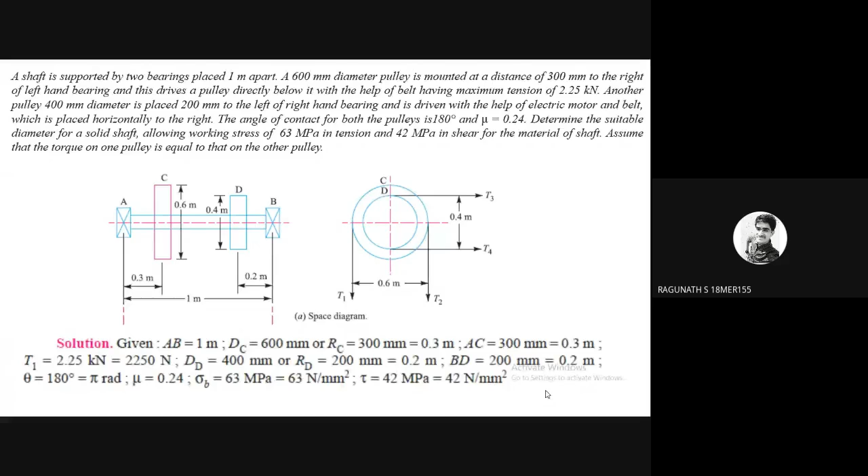So the problem is: a shaft is supported by two bearings placed 1 meter apart. So the shaft length is 1 meter, supported with the help of the bearings.

The A and B are bearings. A 600 mm diameter pulley is mounted at a distance of 300 mm to the right of the left hand bearing, which is bearing A. So from A to the right side is 300 mm, that is 0.3 meter, and the pulley diameter is 600 mm. So pulley C's diameter is 0.6 meter.

This left hand bearing drives a pulley directly below it with the help of a belt having maximum tension. So this pulley is driven by a belt drive, and its maximum tension is 2.25 kilonewton.

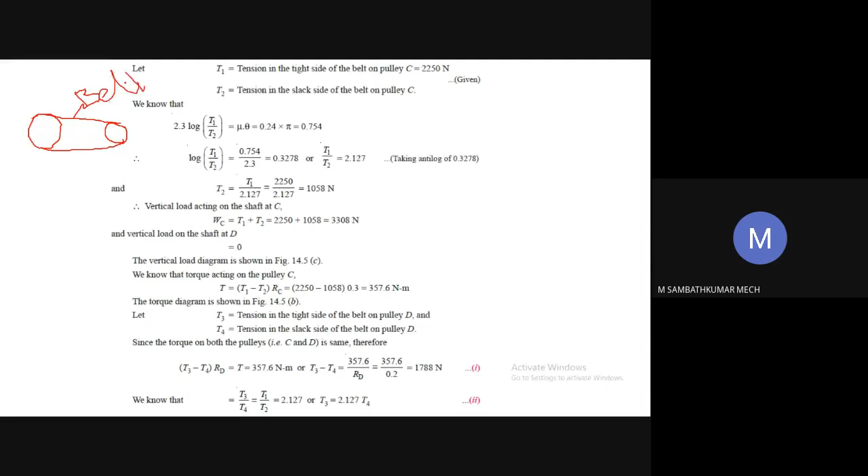If you consider pulley C, it is driven by some other pulley with the help of a belt drive. So this is the belt, this is one pulley and this is another pulley - consider this as your pulley C. When it is rotating in a clockwise direction, one side is the tight side and the other side is the slack side.

At the pulley side, during the meshing or contacting of the pulley and belt - when it starts to engage, that side is the tight side; when it disengages or releases contact, that side is the slack side. So the tight side tension is named T1 and the slack side tension is T2.

Okay, so in your problem, assume this is T1 and this is T2. T1 is the tension in the tight side and T2 is the tension in the slack side.

So the force for T1, the value is given: 2.25 kilonewton. So T1 is equal to 2.25 kilonewton, that is 2250 Newton.

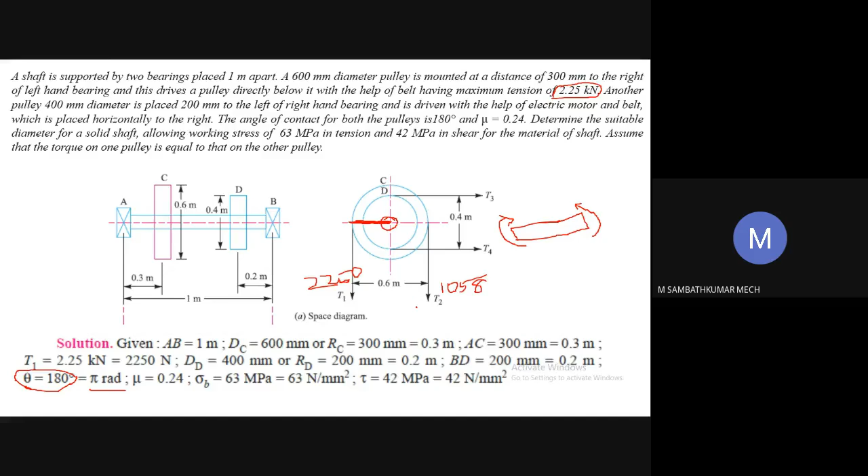Okay, here the shaft is attached. So in that shaft the torque will be generated based on the C pulley forces. In the C pulley, the tension side is 2250 and the slack side is 1058. When the torque is generated, it means the difference between the two loads multiplied by the perpendicular distance. So the torque is equal to T1 minus T2 into radius of the pulley C. So 2250 minus 1058 into radius of the pulley. The radius of the pulley C, diameter is 0.6 meter, so therefore radius is 0.3 meter.

So into 0.3, we can get the torque: 357.6 Newton meter.

And in your problem, assume that the torque on the pulley is equal to that on the other pulley. So if the torque generated in pulley C is equal to the torque generated in pulley D, you can write it as TC is equal to TD, or otherwise for TD is equal to, similarly you can write a similar formula for pulley D.

So for pulley D, that is T3 minus T4. Here the tension side is T4 or T3 and the slack side is the opposite one. So T3 minus T4 into perpendicular distance, radius of the pulley D, is equal to your torque, that is TD, torque on the pulley D.

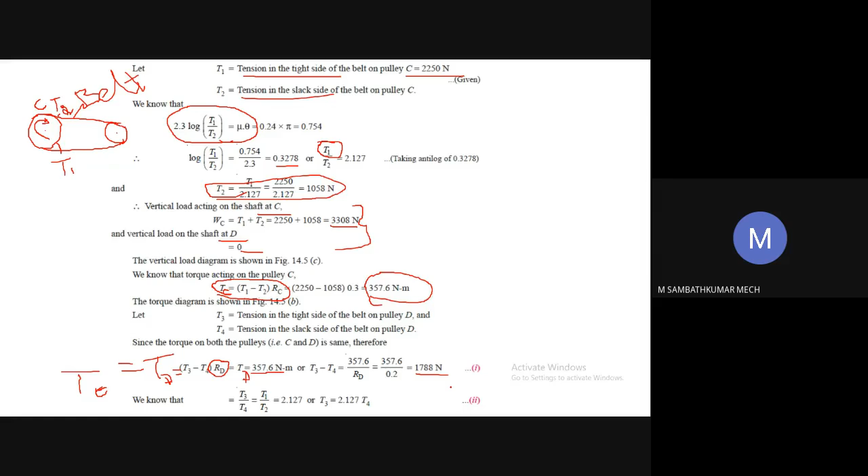The diameter of pulley D is given, so from that we know the RD, radius of the pulley D. So therefore T3 minus T4 is equal to 1788 Newton.

So just consider in the shaft or in the pulley C, some torque is generated. The same torque is generated in pulley D also. It is the condition that the torque on pulley C and the torque on pulley D are equal. So T1 by T2 is equal to T3 by T4. You can write it as T1 by T2 is equal to T3 by T4.

Okay, then only we can get the equal torque. So further, T1 by T2 is equal to T3 by T4. So from that we know the T1 T2 value, or we know the ratio. T1 by T2 is equal to 2.127. Substitute here, so from that I can write T3 is equal to 2.127 T4.

So T3 is equal to, in terms of T4, substitute this value into the term T3 minus T4 is equal to 1788. So we can get T3 is equal to 3376 Newton and T4 is equal to 1588 Newton.

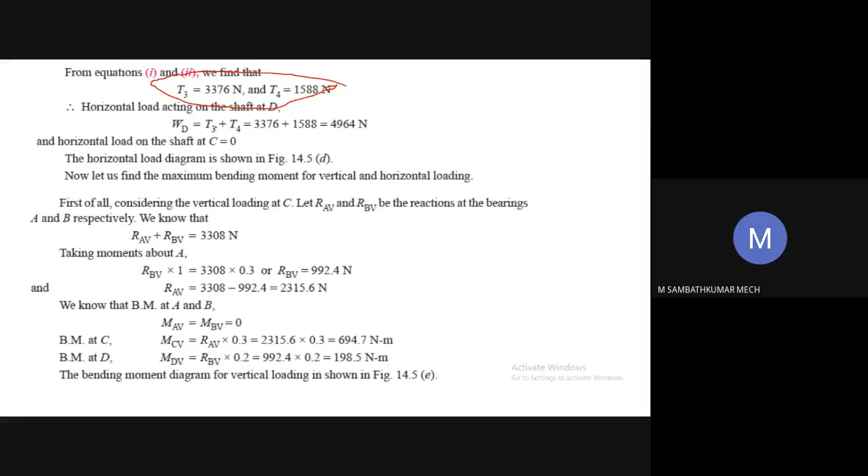In pulley D, the tension side load is 3376 and the slack side load is 1588 Newton. So therefore, similar to pulley C, the total load acting on pulley D. In pulley D, it is a horizontal load. So the total horizontal load acting on pulley D or shaft D at point D: WD is equal to T3 plus T4, that is equal to 3376 plus 1588. You can get 4964 Newton.

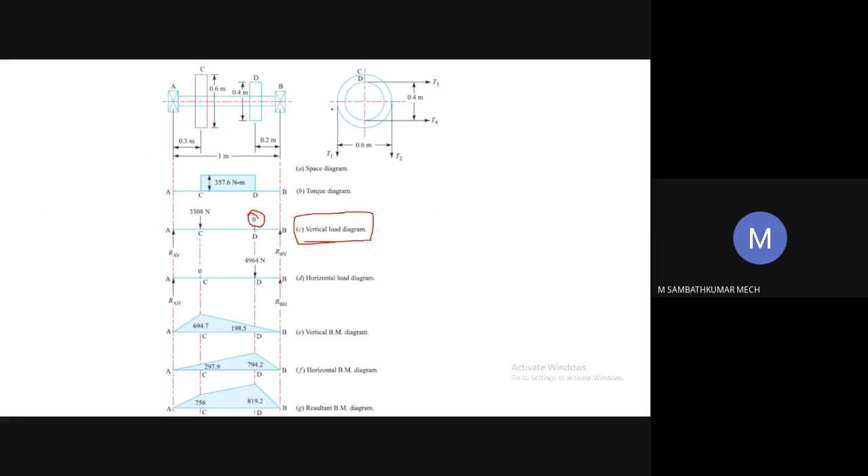And there is no horizontal force or load acting on pulley C. So at pulley C or at point C in the shaft, the WC value is 0. This should also be mentioned in your diagram. In this diagram, the horizontal load diagram at point D gives the value 4964, and at point C, there is no horizontal load, so that is 0.

And you already calculated the torque value, that is 357.6 Newton meter. At C and at D the values are equal, so it is uniform or rectangular. The torque value already calculated is 357.6, and vertical load, horizontal load calculated. So draw an individual diagram for that.

After calculating the vertical and horizontal load, you should calculate the reaction force for calculating the bending moment. You should know RAV, RBV, similarly RAH and RBH. If you calculate RAV and RBV, you can get the vertical bending moment diagram. Similarly, if you calculate RAH and RBH, you can get the horizontal bending moment diagram. From the vertical and horizontal bending moment diagrams, you can get the resultant bending moment diagram. So first we are going to discuss RAV and RBV.

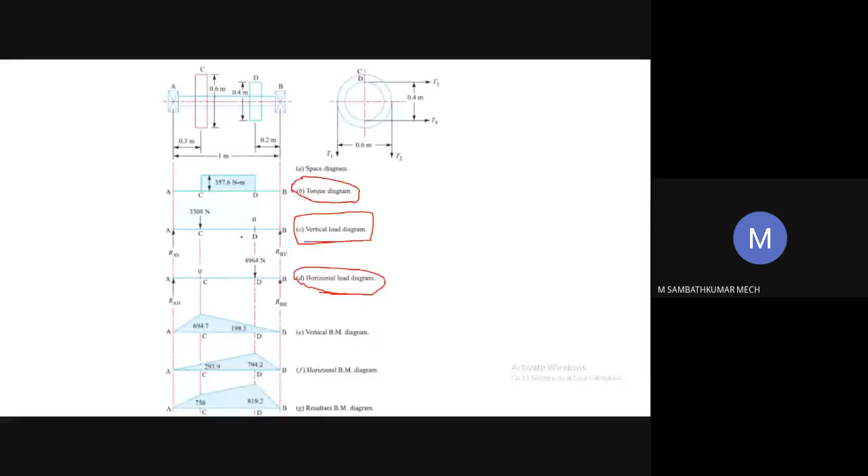So first one, RAV and RBV. In your vertical load diagram, the total load acting on the shaft is 3308. The total load at C point is 3308, at D point 0. So therefore RAV plus RBV is equal to 3308.

Taking moment about point A, RBV into the perpendicular distance. The perpendicular distance is 1 meter. So RBV into 1, considering this A point, taking moment about A point. RBV into 1 is counterclockwise, and at C point, considering this force, it is clockwise.

So RBV into 1 is equal to 3308 into the perpendicular distance, which is 0.3. So RBV into 1 is equal to 3308 into 0.3. From that, RBV is equal to 992.4 Newton. And we already know RAV plus RBV is equal to 3308, so from that we can calculate RAV.

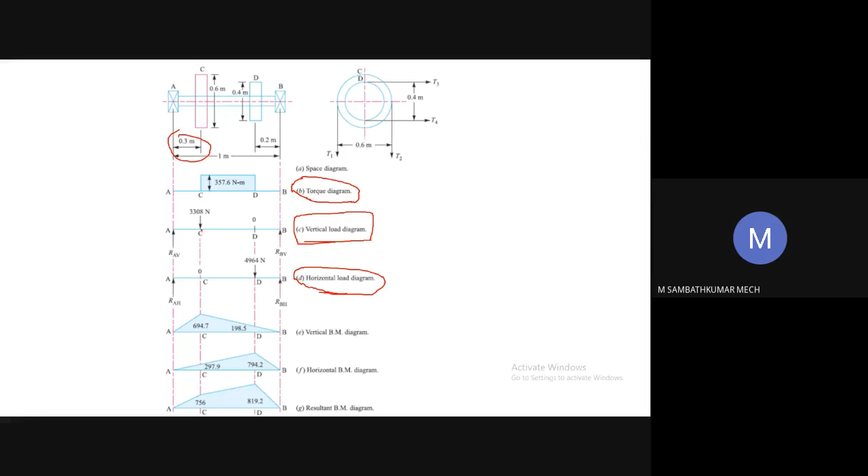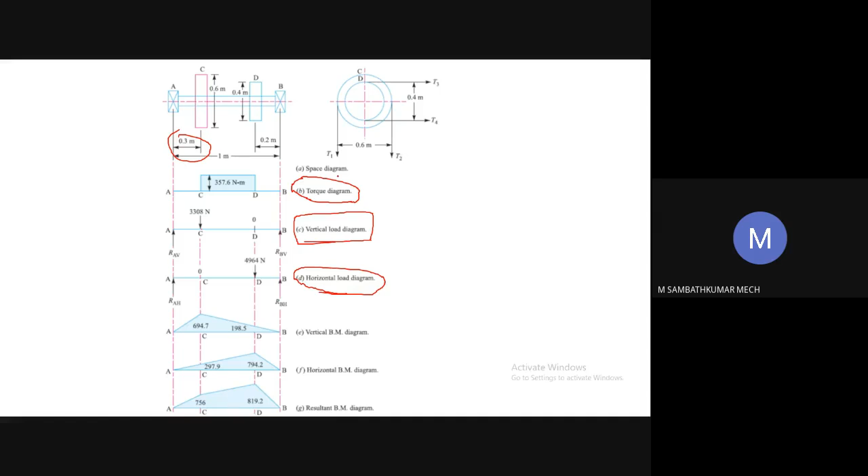Bending moment at C, RAV into the perpendicular distance 0.3, or otherwise RBV into 0.7. You can take any one: RAV into 0.3, or RBV into 0.7.

So we can get bending moment at C: RAV into 0.3 is equal to 694.7 Newton meter, or otherwise RBV into 0.7. The total length is 1, so 1 minus 0.3 is 0.7, and RBV into 0.7 gives the same answer.

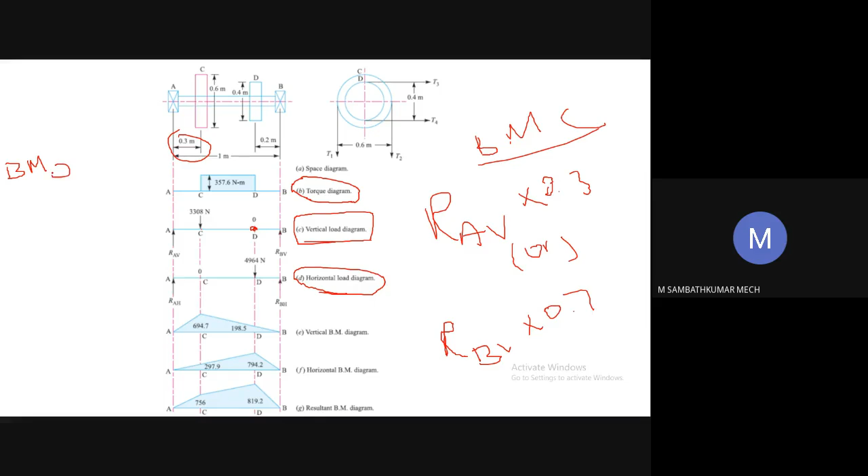Similarly, bending moment at D. Consider this point. For bending moment at D, RBV into the distance 0.2, or here two forces are there: one is RAV and another is 3308. So you can write RAV into the total distance 0.8. From D point to A point is 0.8. So RAV into 0.8, and this is upward force, and 3308 is a downward force.

So minus 3308 into, from C to D, the distance is 0.5 meter. You can use any one: RBV into 0.2, or RAV into 0.8 minus 3308 into 0.5. From this we can get the vertical bending moment at D. The value is 198.5.

So bending moment at C, due to the vertical component, is 694.7, and at D it is 198.5. This was mentioned in our diagram.

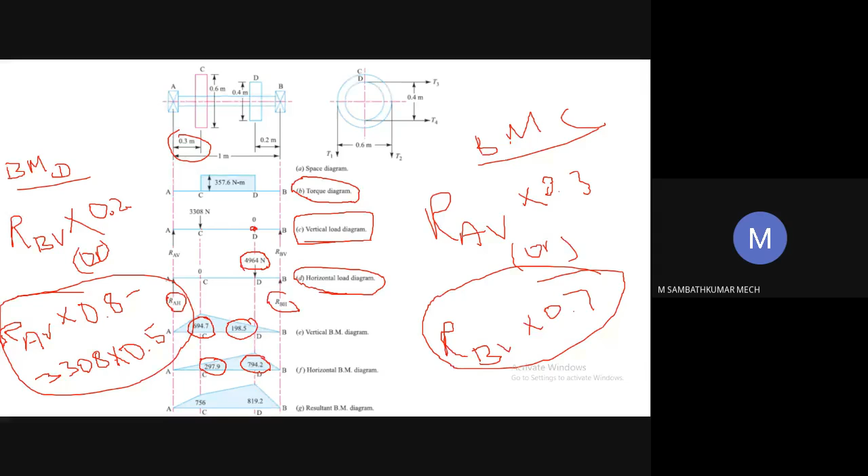This is your vertical bending moment and this is your horizontal bending moment. At the C point, you know the vertical and the horizontal. Similarly, at the D point, you know the vertical and the horizontal. So from that we can calculate the resultant bending moment. The formula is square root of horizontal squared plus vertical squared, or vertical squared plus horizontal squared, whatever it may be.

So from these values we can get the resultant bending moment diagram. At C, square root of 694.7 squared plus 297.9 squared gives 756. Similarly, the resultant bending moment at D is equal to square root of 198.5 squared plus 794.2 squared, and we can get 819.2.

So from this we can get the resultant bending moment at C, 756, and the resultant bending moment at D, 819.

So the maximum bending moment is 819.2. You should consider this value only, because design is based on the higher value only. Don't consider the lesser or smaller value. So therefore the maximum bending moment is 819.2 at the D point.

That is 42 megapascal, or 42 into 10^6 Newton per meter square. Sorry, 10^6 Newton per meter square. So while converting meter into millimeter, you can get 42 Newton per millimeter square.

So substitute in your equation, and in this equation the unknown is diameter only. So from that we can calculate the diameter of the shaft.

So in this problem, the sigma B value is also given, tau value, shear value, and tension bending stress value also given. So you should also consider the equivalent bending moment formula.

So therefore ME is equal to, already we know the formula, half into m plus square root of m squared plus t squared. This square root of m squared plus t squared is equal to TE, so that was replaced here. So we can write the equivalent bending moment formula as ME is equal to half m plus TE.

So we know the maximum bending moment is 819.2, substitute that, and TE value is already calculated, that is 894 in terms of meter. So the total equivalent bending moment is 856.6 into 10^3 Newton millimeter.

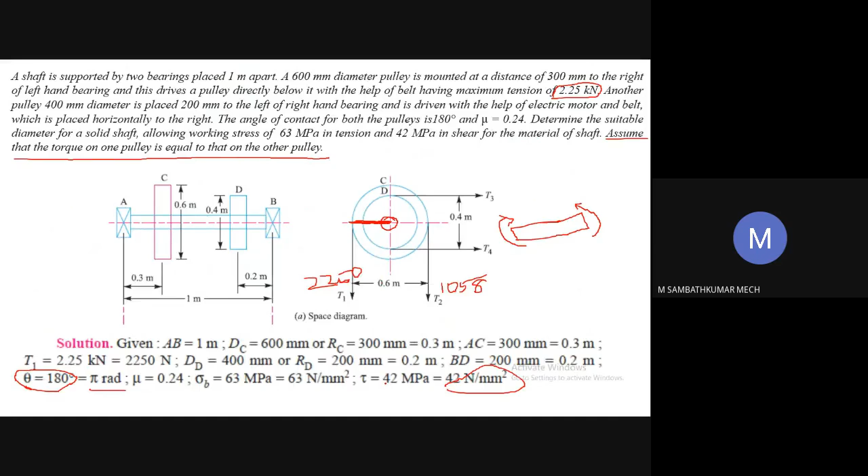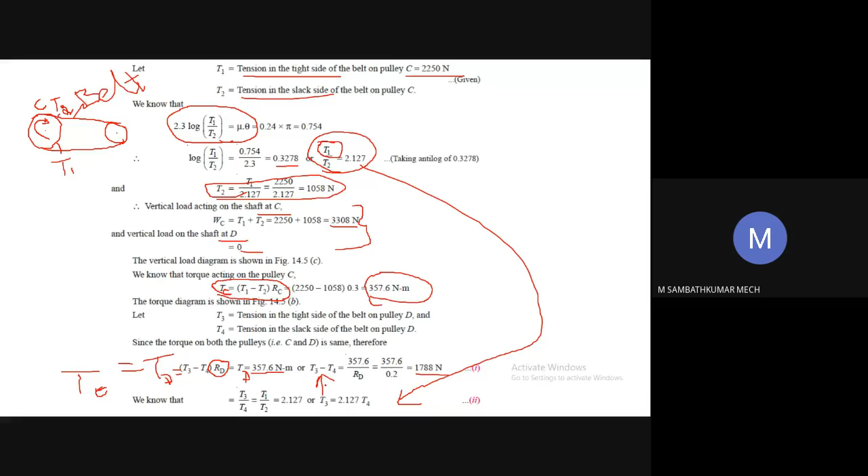So first you should calculate the torque. For calculation of torque, you should know the total load at point C and point D. It is T1, T2. Similarly, for pulley D, T3, T4. You should calculate T1, T2, T3, T4. So from that, you can calculate the torque value at C and the torque value at D.

After that, by calculating the reaction force due to the vertical component and the horizontal component, you should calculate the reaction force. So from that reaction force, you can calculate the bending moment, horizontal component bending moment and vertical component bending moment.

Finally, calculate the resultant bending moment. So from the resultant bending moment, you should consider the maximum value. Design should be based on the maximum values only. Don't design for a lesser value or lower values for any component.

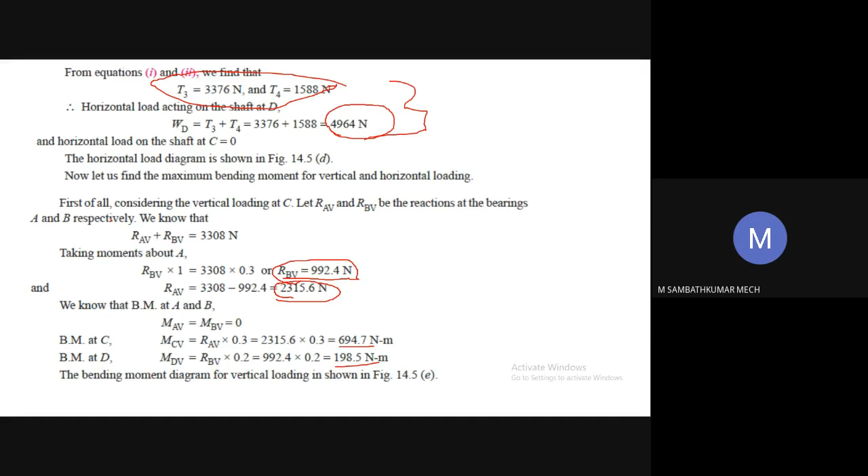So in this problem, two bending moments we can get: one is 756 and 819. So from that you should choose 819.2.

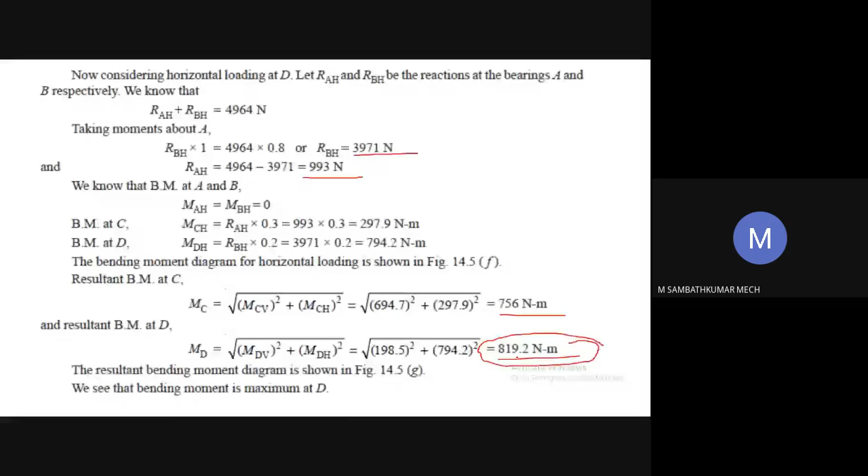So for that, we can get the equivalent twisting moment. While substituting in the equivalent twisting moment, you can get the diameter value as 47.6. And similarly, in the equivalent bending moment, the diameter is 51.7. So two diameters are obtained, and from that you should choose the maximum diameter, that is 51.7.

Then only it will transfer the required load. What are the requirements given in your problem? That amount of force or load is transferred only with the help of this amount of diameter of the shaft. If you choose 47.6, it will definitely affect or easily fail.